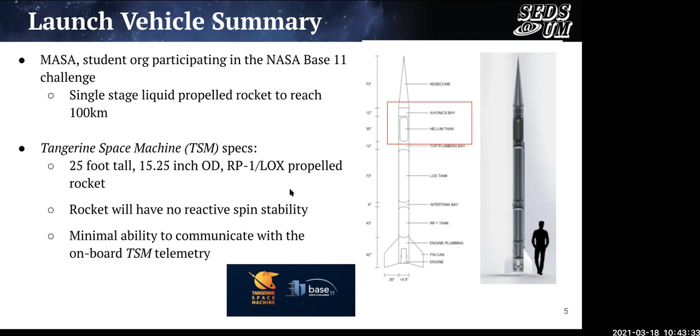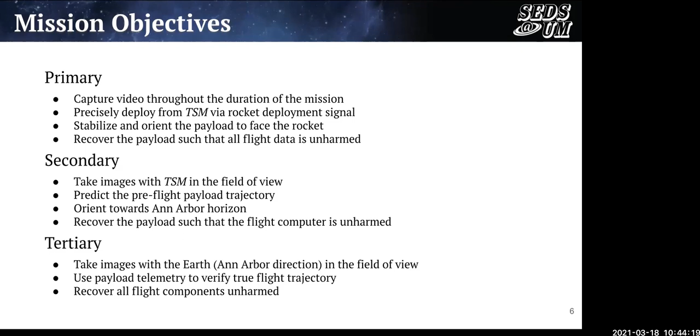So our mission objectives: we want to capture video throughout the duration of the mission. We want to precisely deploy from TSM via a rocket deployment signal. We want to stabilize and orient the payload to face the rocket. And then we want to be able to recover all the flight data. Some of the secondary and tertiary objectives involve taking precise images during this mission and being able to orient ourselves from looking at the rocket to looking at the Ann Arbor horizon, and then taking in all of the flight data that we're getting and being able to verify the true flight trajectory, and, as you'll see in a little bit, how it sort of matches up with our pre-flight simulations.

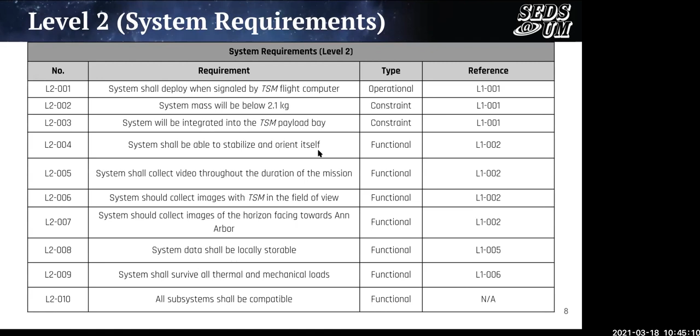So then those requirements flow into our level 2 requirements. Again, these are very similar, and we just have, again, the reference to be able to flow down and see how these requirements decompose the L1 requirements, and we'll be able to see the same when we get to the subsystem requirements. Here's just a basic traceability matrix of the requirements, and again, just that same idea that we can see how achieving requirements works all the way up to our ultimate mission goal.

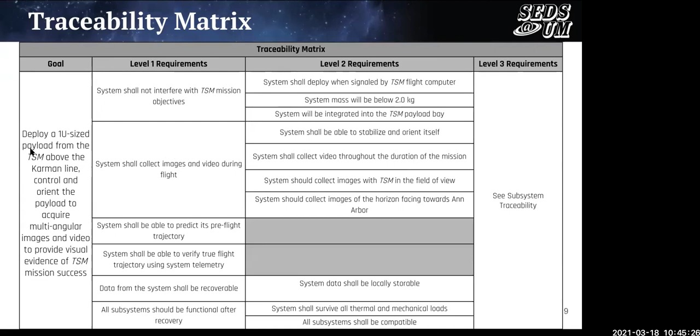Hi, so this is just an overview of our concept of operations, the same as the last time we had a meeting. So our basic concept is that we will lift off inside the TSM, and then we will eject from the TSM and stabilize, rotate around to image the TSM, and then after that we will be taking images of the local horizon. Then we will deploy a parachute and land and be recovered by the staff at White Sands.

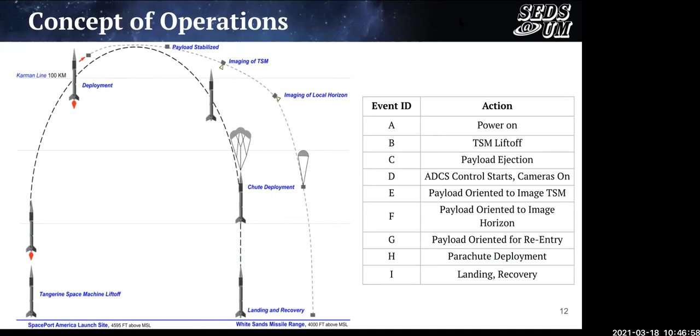This is simply a breakdown of our ConOps by subteams. So the image on the right is basically showing when each subteam is active and when they are going to be in action. So as you can see, CDH and EPS will be on the entire time. The cameras will be on the majority of the time, and then other subteams will have little bursts of activity throughout the duration of the mission.

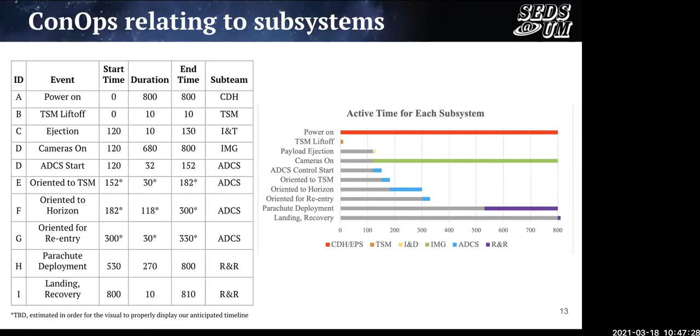This is a definition of our coordinate systems that we will be using for the rest of this presentation. So we have two coordinate systems, one for the rocket, which is centered on the body of the rocket, and one for the payload that is shown in green, which is centered at the payload center of mass.

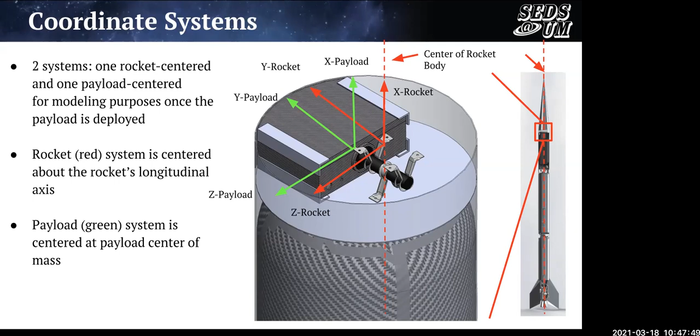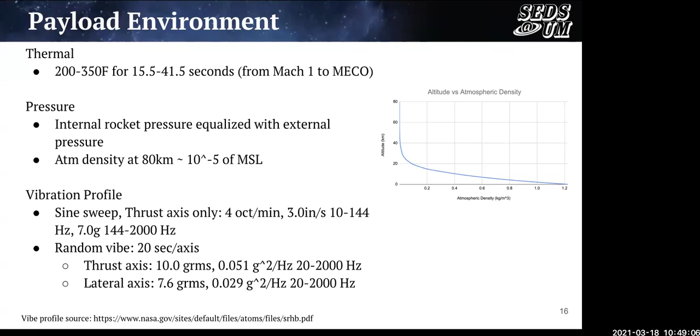So this is a real fast rendering of what the payload is going to look like and where it is going to be in the TSM. So on the left-hand side, you can see the payload is integrated in the TSM. The outside shell of the TSM body is not shown on the bottom half, just so that you can visualize the helium tank and the payload itself.

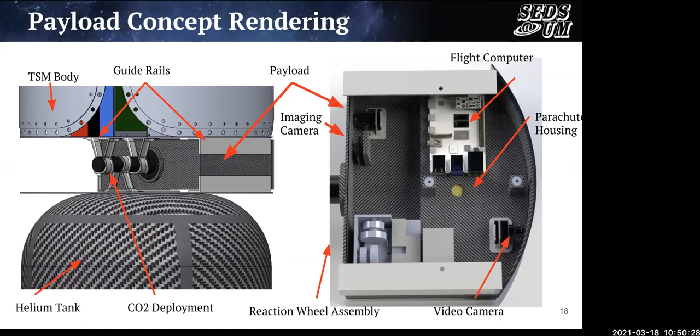It will be interfaced directly to the TSM using guide rails, and then as you can see on the right-hand side, this is a basic layout of the components inside of our payload. So we have the reaction wheel assembly on the bottom left, the video cameras on each side of the payload, and then the parachute taking up the bottom right side of the payload. And then this is just a video to better show the locations of everything within the TSM payload.

This is basically a slide explaining how we are making sure that we are keeping on track with our mass margins per each subteam. The way that we are color coding this is whenever you see a mass budget, if we are within our mass margins, we will label it as green. If we are just on the edge, we'll label it as yellow. And if we're outside of our mass margins, it will be labeled as red.

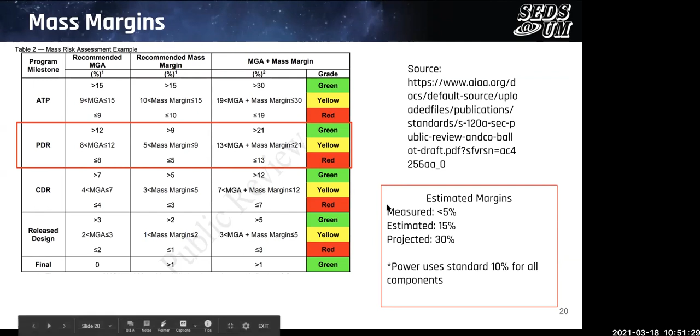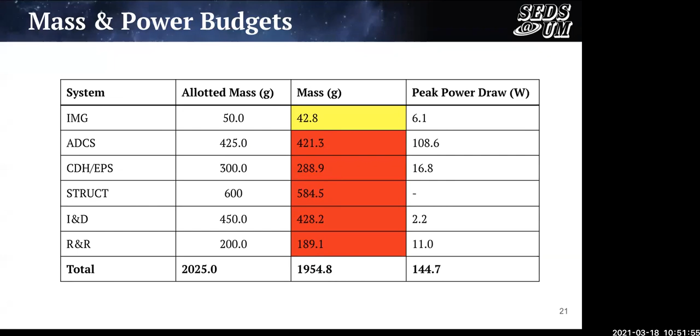As you can see from this slide, per subsystem, we seem to be outside of our mass margin. But if you look at the bottom table, you can see that we are still within our total allotted mass. It's just per subsystem, there are a little bit of differences. So we are currently working on that to lower the mass for each subsystem. But as you can see, we still have not exceeded our total allowed mass.

And now we'll go into subsystem summaries, and I will hand it off to Owen. Thanks, Juliet. So I'm going to be leading you through the imaging and video subsystem. And so this is the team that's responsible for capturing and storing all the image and video data.

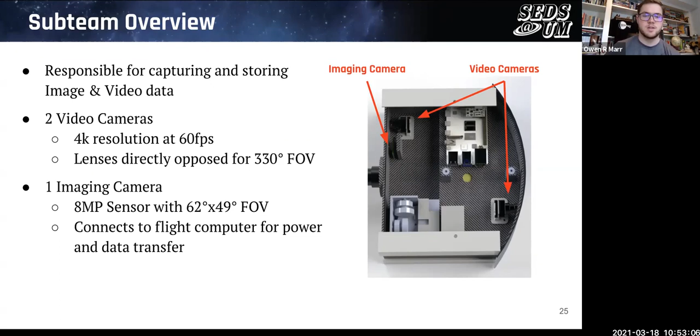And so we'll talk about our requirements in a second, but our overall design is that we have 2 video cameras, which run at 4K 60 FPS. You can see they're kind of opposed there, which gives us a really good field of view. And then we have 1 imaging camera, which is an 8 megapixel kind of normal FOV type camera. And this connects directly to the flight computer and has a couple different jobs.

So here are the selections that we made. So as I said, we had requirements which kind of flowed down. Then we did a trade study for each of these to figure out what the best component is. We ended up with this 10.3 gram camera, which is really, really small, not a lot of mass, but it does give us 4K 60 FPS, which is really what we wanted to get really good quality video. This also stores all the data directly on an SD card. We're going to have 3 SD cards on the payload, which will give us a little bit of redundancy should something happen to one of them.

And then for our imaging camera, we're using the RPi camera V2 because this integrates really, really well with our flight computer, which is RPi. And it also only weighs 3.4 grams, but has an 8 megapixel sensor. And so these are our kind of component level choices for the imaging team.

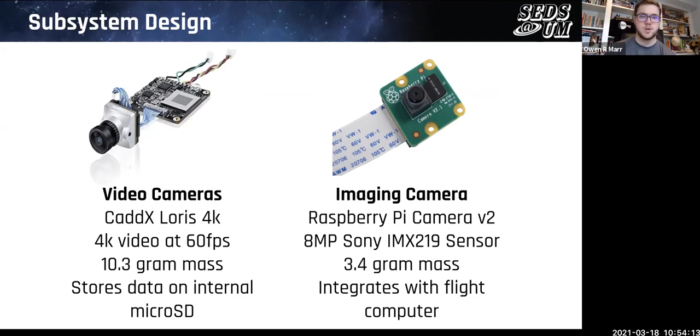Here you can kind of see a little bit of a wiring diagram. Basically, the imaging camera is wired with both power and data to the RPi. And then the video cameras will be provided power through our power bus, but get signals from the RPi to start and stop. And these video cameras start recording as soon as they turn on. So the RPi is just going to send a signal to the power bus, which then enables the power switch basically. And then the video cameras will start recording. And once they're turned off, all the data is stored on their respective SD cards.

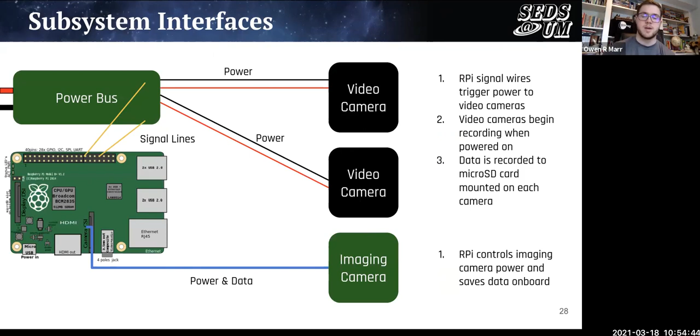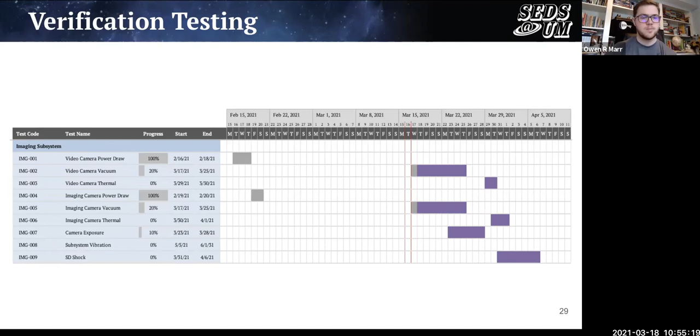All right, I'm going to pass it off to Liam, who's going to go through the ADCS. Thanks, Owen. Hey, everybody. My name is Liam Spence. I'm the BX-4 ADCS sub-team lead. I'll be presenting our slides on the Attitude Determination and Control System subteam.

So ADCS is responsible for implementing solutions that allow our payload to autonomously determine and control its attitude during the mission. We will achieve this through the use of an integrated sensor array, various control algorithms, as well as attitude control hardware that will be dynamic during the mission.

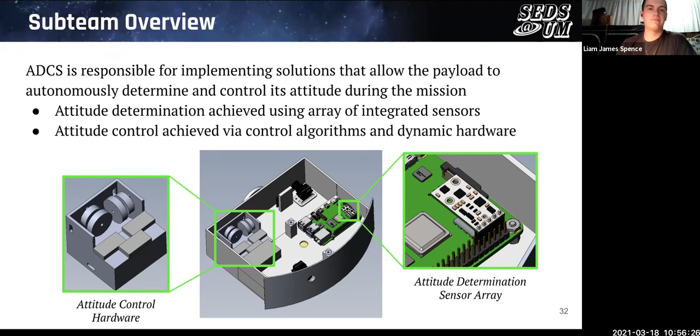To break things down, ADCS is comprised of three main components, each of which will be elaborated on in the following slides. These include attitude determination sensors, dynamic attitude control hardware, and the image processing and inertial control software that ties both of our hardware aspects together.

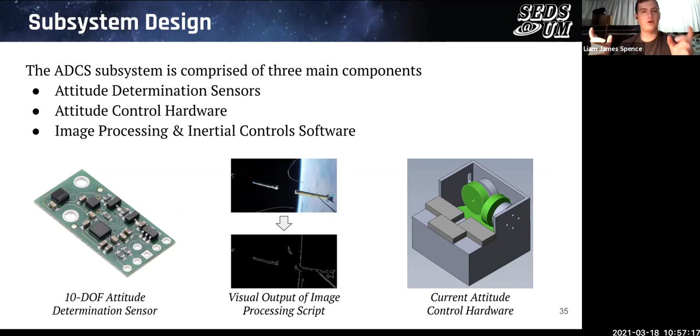Going more in depth on attitude determination, our payload will achieve autonomous attitude determination using a 10 degree of freedom sensor, as well as the still imaging camera from the IMG camera array. The 10DOF sensor measures the dynamics and orientation of the payload using an integrated gyroscope, accelerometer, and magnetometer, all on one low mass board. This board also includes an altimeter that will be used by the reentry and recovery subteam in later stages of the mission.

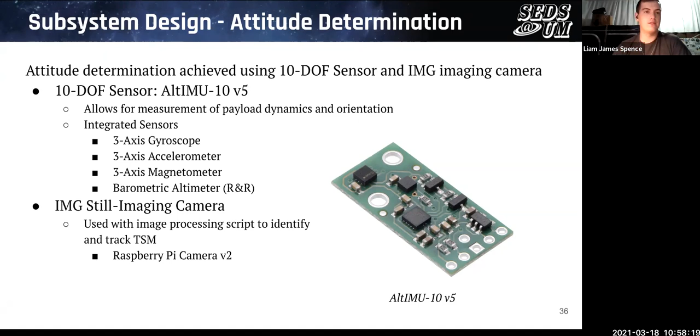The still imaging camera that IMG has now integrated will take pictures of the payload's surroundings. These images will be processed using an onboard processing script, explained later in these slides, in order to identify and track TSM in real time.

This slide covers the technical capabilities of our 10DOF sensor. Functionally, the sensor measures the rotation rates, accelerations, magnetic orientation, and altitude of the payload. Each of these measurements has a large enough range and fine enough sensitivity to adequately measure the expected values we'll see during the payload's operation and flight.

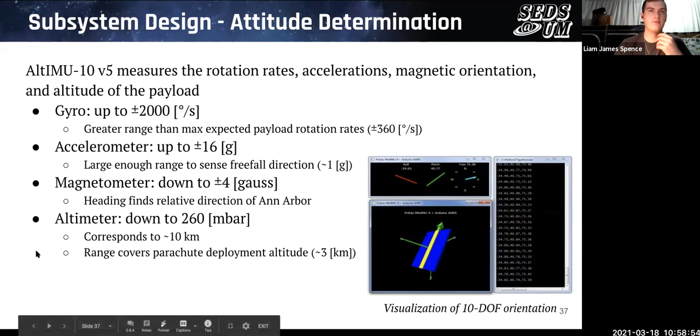Here you can see more of our attitude control hardware. We will achieve our attitude control using a 3-axis reaction wheel assembly, comprised of one reaction wheel, a combination of motor and flywheel, mounted parallel to each of the 3 primary payload axes.

The reaction wheels will be powered by electronic speed controllers, or ESCs, in order to apply torque to the specified flywheel, spinning it up to a high RPM. The spinning flywheel will then impart angular momentum into the payload such that it counters the momentum imparted to the payload during deployment and the previous flight during ascent.

Payload angular momentum from deployment and from the flywheels, equal in magnitude but opposite in direction, will lead to a net zero rotation rate in that axis. Spinning the flywheels faster or slower than the rate required to negate the payload's own angular momentum allows our ADCS subsystem to properly control its attitude in all 3 axes during the mission.

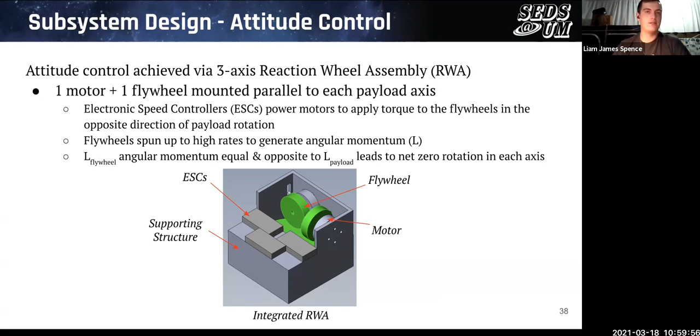The 3 main components of our reaction wheel assembly include brushless DC motors, electronic speed controllers, and metal flywheels. For our motor choice, we selected a high-performance motor model commonly used in acrobatic and racing quadcopters due to its high torque and max RPM ratings.

The ESCs we selected host an onboard microcontroller that allows each to be individually programmed and tuned outside of any integration with the payload's own flight computer. This will allow the ESCs to have different fail-safing modes in response to a variety of off-nominal power conditions we might experience during flight.

They also run their own closed-loop PID control using feedback from the 3-phase motors to properly spin up the flywheels as commanded. For our flywheel design, we currently have selected discs made of brass, due to the simplicity of manufacturing and the high material density that these provide. We anticipate continuing to use brass as our flywheel material.

However, we are currently pursuing other more complex flywheel geometries that will allow us to make the reaction wheel assembly overall more compact, as well as increasing the moment of inertia efficiency of each flywheel in each axis.

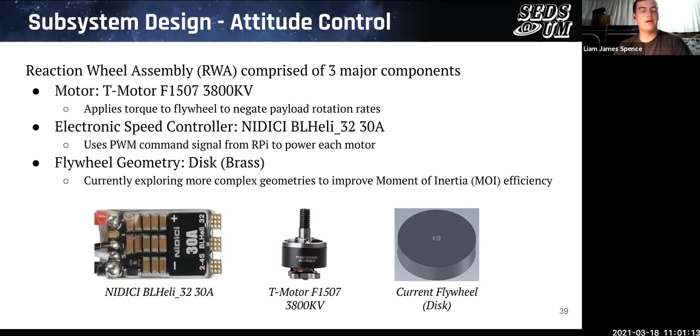In addition to the flywheel considerations, some future work includes collaborating with the integration and deployment team to determine the feasibility of adding additional sensors into our payload. These sensors would sense rotation on the motor if we go with them, and would allow more fine-tuned control of the motors spinning at lower RPM. This would in turn allow the payload to have very precise control of its rotation rates in each axis, compared to our current design.

So while sensorless control, the current design we selected, is feasible and achievable with our current hardware selection, exploring a more sensored control using external motor encoders would further increase our control capabilities of the payload.

Initially, the ADCS subsystem will attempt to negate the rotation rates imparted during deployment in each payload axis, as previously described. Once these are all approximately zero, the next script will begin the process of finding and tracking TSM using images from the IMG script. This script will be further elaborated on in later slides.

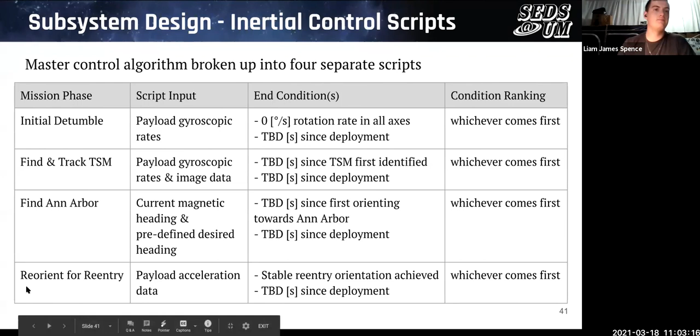So for current progress, we have created the pseudocode and logic flow for each of these software scripts, as well as nearly completed a Simulink program that will help us refine the PID gains used in our overall flight control loop. Each script presented in the previous slide will implement closed loop PID control using the 10-DOF sensor data as feedback.

The output of these scripts will then be commands to the reaction wheel assembly, which will be processed and implemented as torque to the motors by the ESCs that I described earlier.

In the near future, we will determine additional appropriate time-based cutoffs for each script's end condition, to ensure our payload does not become latched up in one of the intermediate scripts during the actual mission.

So now I'll hand it off to Trina to go over a bit more of the image processing aspects of the ADCS software.

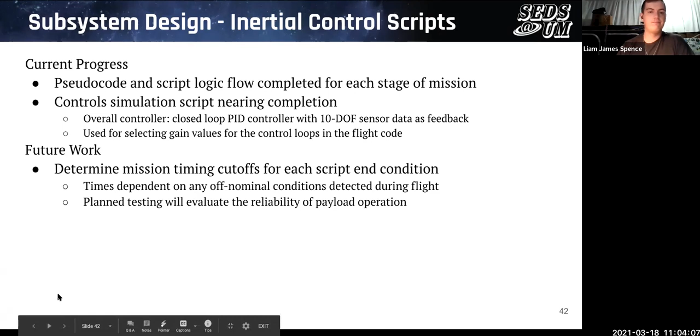Hi, my name is Trina Dada, and I will be talking a little bit about the ADCS image processing script. We'll be using OpenCV, an open source image processing library, to identify and track TSM given images from the still imaging camera.

The script will use a combination of edge detection as well as color distributions to identify the contours of Earth, TSM, and space.

Once TSM is identified in an image, we will calculate the location of the center of the contour and orient our spacecraft to match TSM's center with the center of our still imaging camera's field of view.

Our next steps include identifying the actual elements. For example, TSM should have two long parallel edges, and creating histograms of the RGB values within each contour to verify we've correctly identified the elements.

For example, we can expect nearly all zeros for space, a pretty even RGB distribution for TSM, and a higher blue content for Earth. From there, we can calculate the X and Y shifts required to match TSM's center with the center of our still imaging camera's field of view, and back out the rotation required in each axis.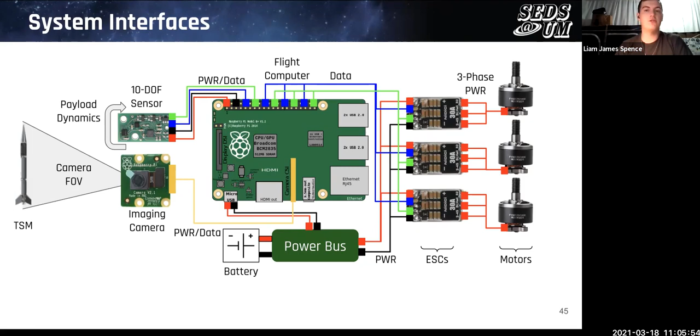Our attitude determination uses its own 10-DOF sensor as well as IMG's imaging camera, and data from both of these sensors will be collected for attitude determination. This data includes the payload dynamics, as I mentioned earlier, as well as image data that is sent back to the payload's flight computer, as Trina just described.

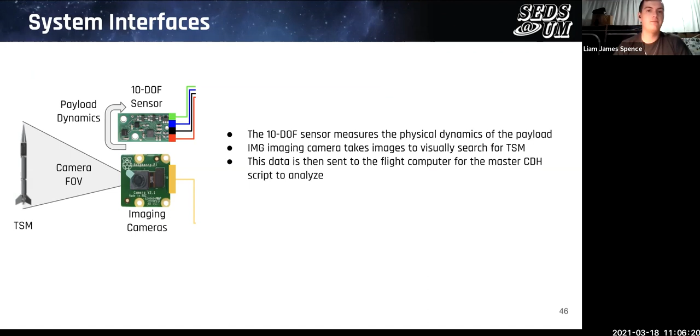The payload's flight computer then uses the onboard script to both process the imaging data as well as the attitude determination data. This is one of the primary components of our command and data handling subteam, and they will go over a bit more about this later in the presentation.

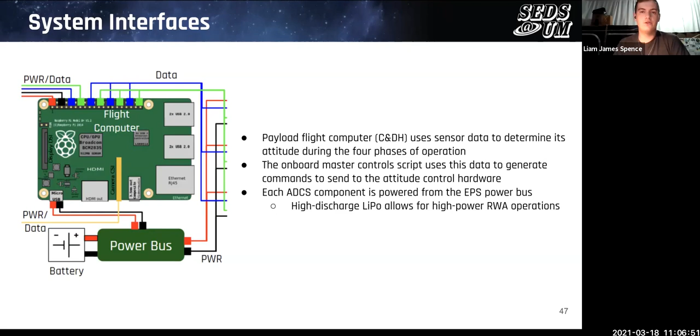All of ADCS's electrical components will be powered off of the payload's power bus, as you saw on that previous slide. It will also be further described by the electrical power systems subteam.

The commands output from the flight computer are delivered to the ESCs, where they're processed by onboard microcontrollers and used to time the power delivery from the payload power bus to each motor's 3 phases.

These motors will spin up the flywheels to many thousands of RPM during the mission, which requires heavy collaboration with the structures subteam to design adequate mounting solutions so everything maintains structural rigidity during flight.

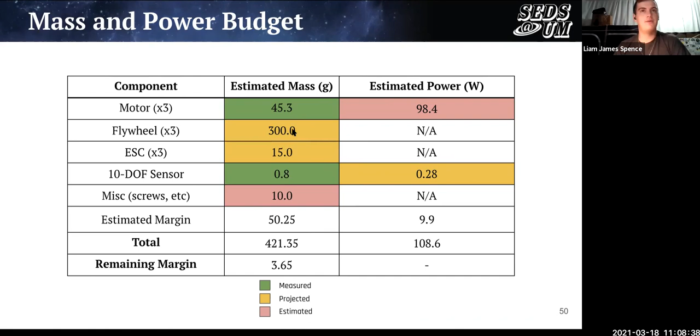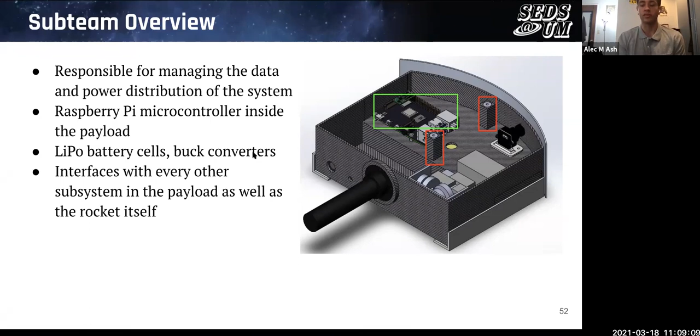For our subsystem design, we started with our choice of microcontroller. We chose a Raspberry Pi 4B, as it has up to 8 gigs of RAM and a 1.5 gigahertz CPU clock. It's the most cost-efficient microcontroller, costing only about $75, and is more than capable for our purposes. It can easily interface with all necessary subsystems, as it's capable of transferring simple input-output data, as well as more complicated serial, I2C, and PWM interfaces.

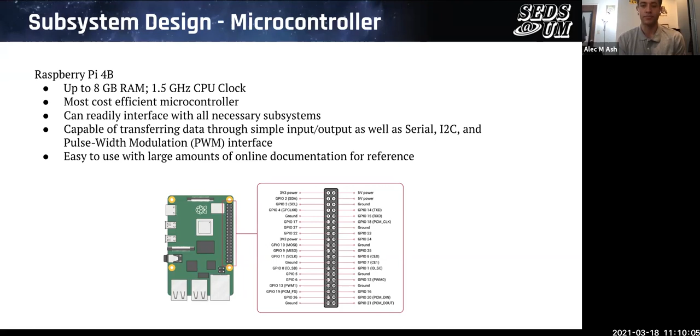For our battery selection, we chose lithium polymer over the alternative, lithium ion, due to its high instantaneous current capacity and much greater safety. Lithium polymers do have a lower power-to-mass ratio, but we decided the pros much outweighed the cons.

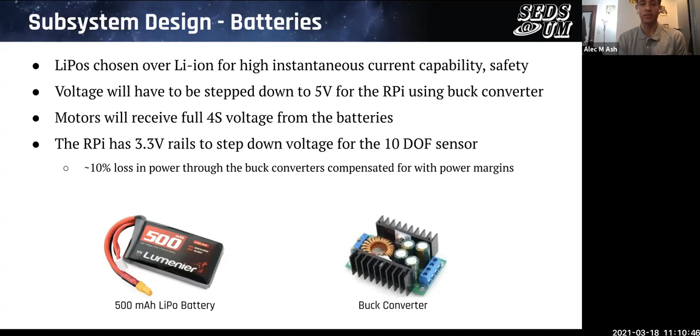The voltage from our power supply will have to be stepped down to 5 volts for the Raspberry Pi, but our motors will be able to receive the full 4S voltage configuration. The Raspberry Pi has built-in 3.3 volt rails, which will further step down the voltage to the 10 degree of freedom sensor, as well as other components.

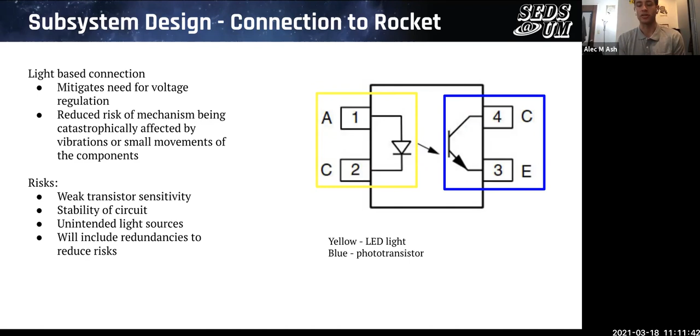We chose this configuration because it mitigates the need for large voltage regulation. The signal coming from the rocket itself will be about 12 volts, which is far too great for the flight computer to handle. So if we can take that 12-volt signal and convert it to a 3.3-volt signal without active voltage regulation, this simplifies our design greatly. It also reduces the risk of the mechanism being damaged by vibrations or small movements during launch and ascension, as could happen with a magnetic or spring-loaded connection.

Taking a closer look at our deployment circuit, the red box in the top left represents the voltage coming from the rocket. That comes in across the top horizontal line, gets relayed by our optical connection, and is read into the Raspberry Pi as our deployment signal. Once we receive that deployment signal, we send a signal to a MOSFET switch, which closes the circuit on the left, redirecting the voltage from the rocket to our deployment mechanism, initiating deployment. Since we have no physical connection over the optical link, the payload will be able to eject swiftly and easily.

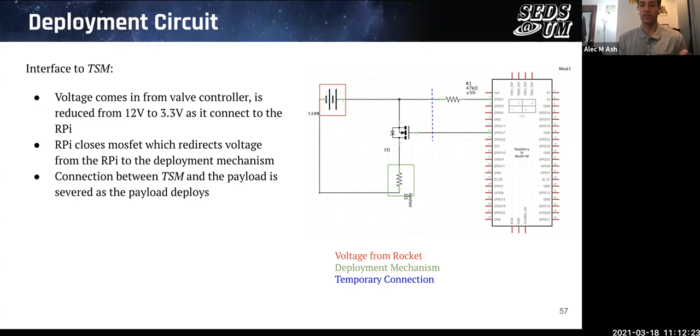To go a little bit more into our interfaces with the other subsystems, we are going to use a PCB to distribute the power independently of the RPi, and this power bus will include all necessary voltage converters. We are going to mainly use GPIO pins to send both binary input-output signals and the more complicated information to the other components. The Raspberry Pi imaging camera that Owen mentioned earlier will be connected through the camera port. The video camera will transmit data over the serial interface pins, and the IMU sensors will be able to transmit data over the I2C pins.

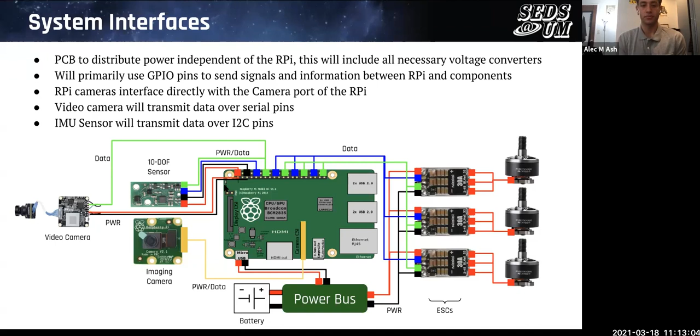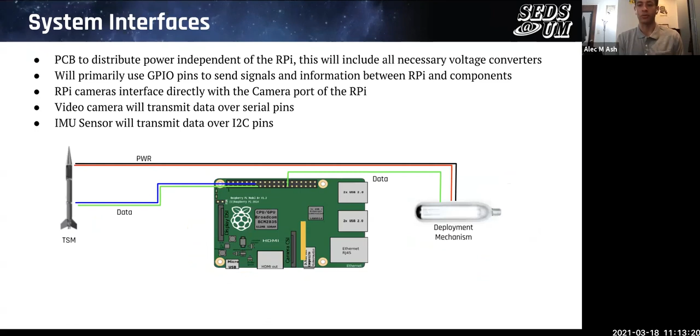And then again, this is just another look at the overall deployment mechanism. We will receive launch and deployment signals from the rocket, and we will relay that deployment signal to our deployment mechanism, which will close the switch on that power, redirecting that voltage from the rocket to our deployment mechanism.

A closer look at some of the data that we will both receive and transmit to the other subsystems. To the IMG subsystem, we will continuously power the video camera, as well as send a trigger signal to take still images. The flight computer will implement their computer vision algorithm to detect the edge of the rocket as a reference for our attitude determination.

For the ADCS subsystem, we will read in and log their telemetry data, which will be used to reconstruct the true flight trajectory, as well as feed this data to the control script, which will then be converted to commands sent to the ESCs. For the reentry and recovery subsystem, we will send a signal to deploy their parachute upon reentry. And finally, we will receive signals from the TSM rocket through our phototransistor at the launch and deployment events.

Here's just a quick look at our verification testing. We've just about completed our testing on the optical connection, and I've completed the testing on our sleep state for the RPi on the launch pad. The next step will be to conduct thermal and vacuum chamber testing to ensure that the RPi can operate at all of our expected conditions.

We will then test the data transfer from the IMU sensor through the flight computer to the ESCs, as well as verifying our triggering of the camera, deployment mechanism, and parachute. And finally, we will end up testing our full script, as well as our full battery output.

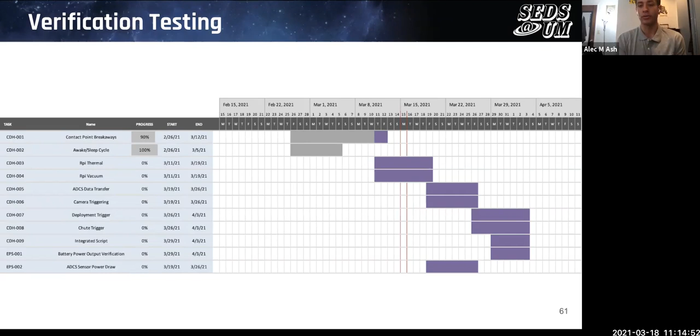Thank you, Alec. My name is Rodrigo. I'm the structures lead, so now I'll be giving you an overview of our subsystem. So structures is responsible for housing and protecting the payload components throughout all stages of the mission. The way we will do this is by a 3D printed shell, also with a 3D printed lid that will bolt on top. And this shell will interface with the outer rocket skin, the deployment mechanism, and the parachute housing.

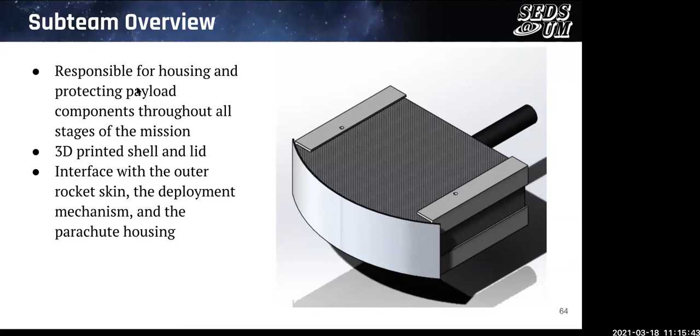So here are requirements. I'll highlight that obviously the structure shall house all components through launch, deployment, and reentry. We shall not jeopardize the structural integrity of our launch vehicle, the TSM, and our structure will fit within the allotted payload bay in the TSM.

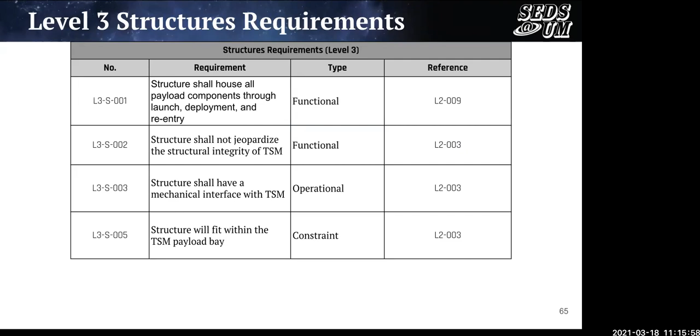Sorry, it lagged for a bit.

Our subsystem interfaces. The cameras will have 3D printed mounts and have a glass protective lens on the payload shell. Reason for this is, you can see in the top left picture, the camera facing the curved edge. That curved edge is going to get very hot due to aerodynamic heating. So a protective lens is needed to make sure the cameras do not sustain any sort of temperature damage.

The RPi will be suspended on standoffs, which will be directly printed into the payload, with the 10-degree of freedom sensor directly attached to that board. The reaction wheel assembly, which is that silver box you see in the top left, will be in its own isolated mechanism, which will then bolt into the payload.

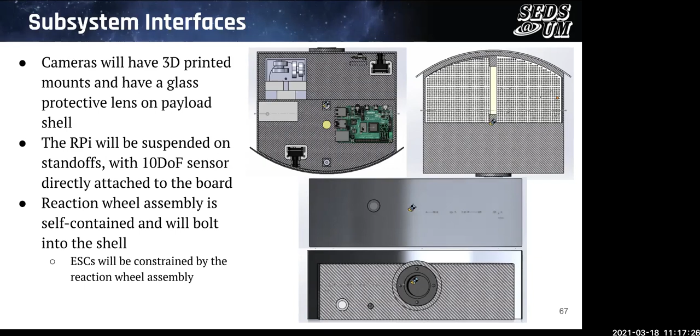So to validate our design, we decided to run a structural FEA on the payload design. The purple regions that you see are fixed supports, meaning it cannot move in any of the 3 directions. And then we applied an acceleration to the entire body. The acceleration applied was 67.2 meters per second squared. This was a worst case scenario number that we pulled from the flight simulations that MASA did on their vehicle.

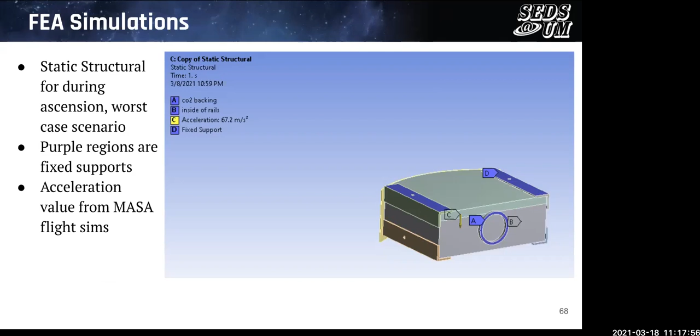And so from this, we see a max stress of about 2 megapascals at the interface between the rail and the shell lid. I want to emphasize that this is a strictly mechanical loading. This is not coupled with the thermal loading we expect to see. That simulation is still being refined. It's not pictured here, but the stresses inside the shell itself are minimal. So this is good. It'll have very little impact on the internal components.

And so taking this max stress and the data from the manufacturing company that will 3D print this shell, we get the following safety factors in the 1, 2, 3 direction. So the 1 direction being the strongest, around 40, the 3 direction being the weakest, around 19.

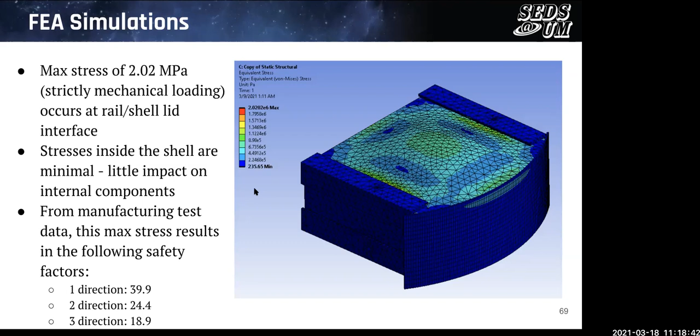So here's our mass and power budget. As structures, we don't really have a power budget. The shell body and the shell lid mass estimates come directly from the SolidWorks file. We are assuming about 25 grams for the bolts and mounting, although that hasn't been measured yet, with an estimated margin of around 80, which brings us to a total of 584, which is still below our allotted mass of 600 grams.

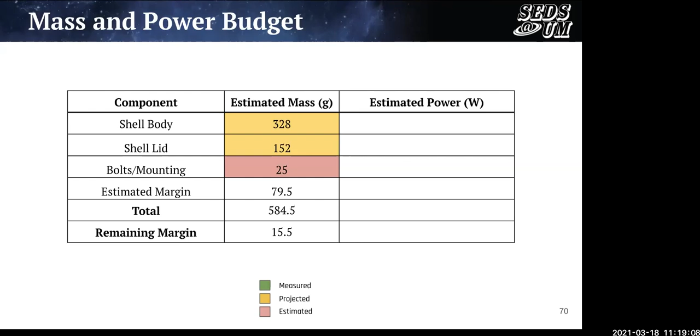Now I'll hand it off to integration and deployment. Thank you. Hi, my name is Rachel Byram. I'll be presenting for integration and deployment. I'm also the lead for the sub-team.

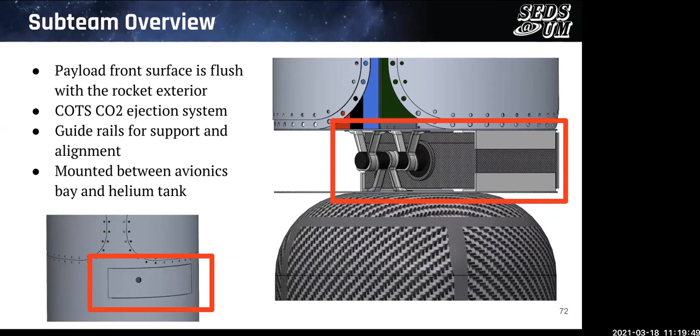So our sub-team is in charge of creating a deployment mechanism for the payload to deploy. And we're also responsible for integrating with the rocket. So we've done this by creating a CO2 ejection system, creating guide rails and plates for support, and then mounting in between the avionics tank and the helium tank and the avionics bay.

So for the payload supports and integrating with the rocket, we're going to have guide rails that are highlighted in red. They're basically L brackets on all 4 corners of the payload. And then we also have a bottom plate and a top plate to mount those into. It's the bottom of the avionics bay and then on top of the helium tank. And this limits the direction of motion for the payload so that it can only deploy in the plus Y rocket direction. The rails also have a low coefficient of friction and low coefficient for thermal expansion.

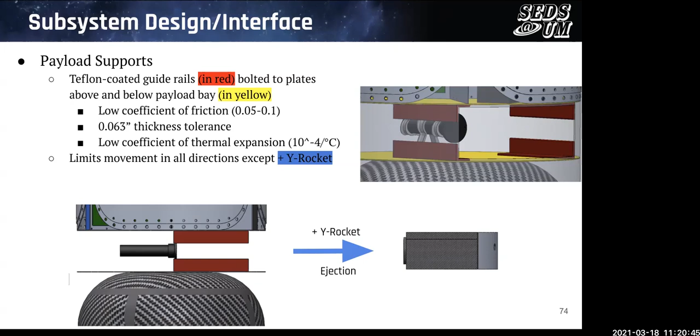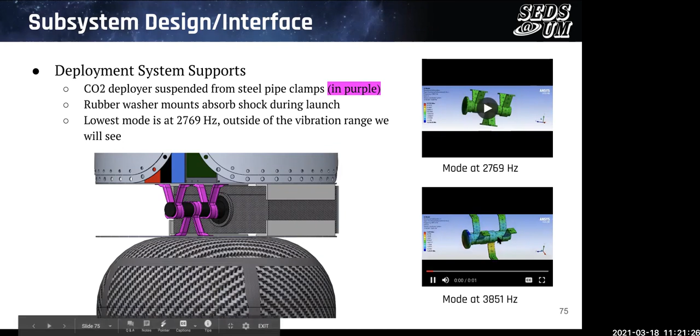To keep the payload in place on ascension and before we deploy, we have nylon fasteners that are mounted into the avionics plate and the Teflon coated rail and into the payload. And then when the CO2 pushes against the payload and has that ejection force, the pins will physically shear off so that the payload can deploy when we want it to. The required shear force per fastener is 39.7 pound force.

And this is a breakdown of the CO2 deployer that we're going to be using. We're going to be using 8 grams of CO2. We're going to have to partially vent that because it provides a little bit more force than we want for our desired range of velocity. So we're going to have to vent that, but we are using the smallest available, which is 8 grams of CO2. We really wanted to have a part that was manufactured outside of ourselves, so that it's been reliably used in other aerospace applications.

It's triggered using the MJG firewire electric match and ignites the black powder, which pushes the CO2 bottle and opens the pin, allowing the payload to deploy. And then for our safety, because we're using black powder and everything, we are going to be using remove before flight key tags, which disengages the electrical match connected to the black powder and the CO2, just for team safety leading up to launch.

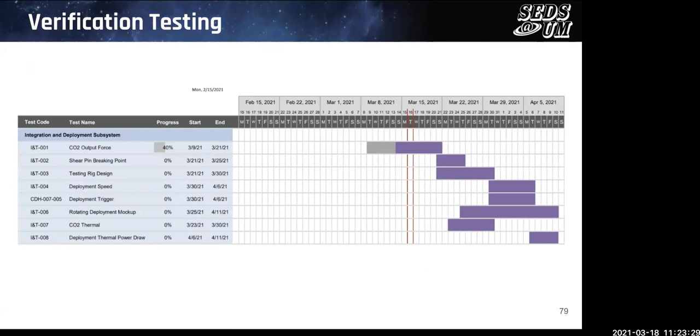And this is our verification testing that we're doing. Right now, we're in the middle of testing our CO2 output force and verifying our feasibility for our system. And then once we do that, then we'll move into thermal testing and verification testing for the rest of our system.

Thanks, Rachel. Yes, my name is Jacoby Kroschel. I am the lead for the reentry and recovery subteam. So kind of a subteam overview. We're going to be using an altimeter-driven parachute deployment using line cutters.

So here are our requirements. They are similar from the last presentation. The one to note is the parachute shall decelerate the payload to 5 meters per second or below for landing. This will provide sufficient deceleration in order to recover all data intact.

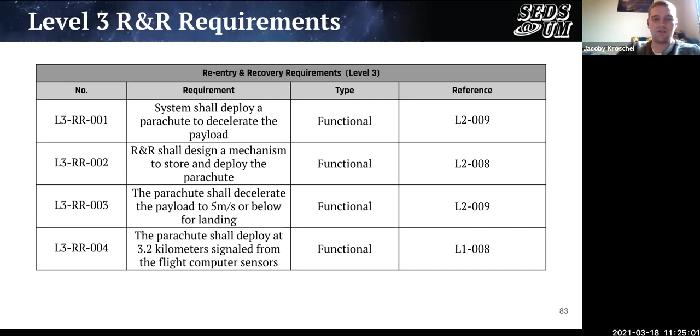So for subsystem design, some of our selected components were the Iris Ultra 36-inch parachute. This was selected because the parachute parameters allowed for a velocity sufficient to be within that 5 meter per second impact speed. And the parachute system will be comprised of a swivel, shock cord, as well as the parachute.

We're going to be using the Tinder Rocketry Piranha line cutter. This will shear the webbing and allow the parachute to release when triggered, and it's going to be powered by an electric match. And then we'll be using the AltIMU 10 degree of freedom data from ADCS in order to know when the E-match should ignite.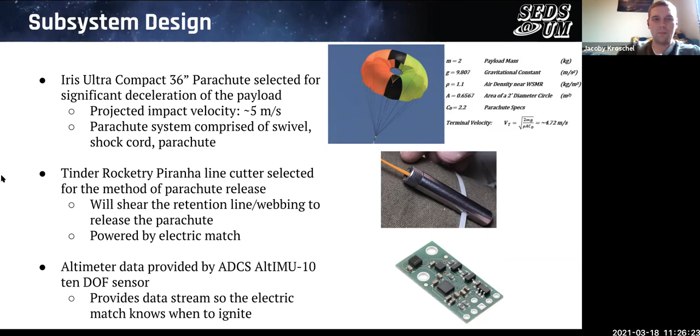So for the netting material, we plan on using solid braided nylon rope. This should be sufficient in holding it in with a tensile strength of 320 pounds of force. The barrel swivel will be used to reduce risk of entanglement once the parachute is deployed. The shock cord is used to dampen the impact after parachute deployment, and the MJG FireWire will ignite the black powder that severs the netting.

So here's our interface with the flight computer. We'll be receiving signal in from the AltIMU 10 degree of freedom sensor. That signal will be processed by the RPi and provide signal to the power bus in order to ignite the E-matches and therefore the line cutters. And so the process for that is the 10 degree of freedom reads into the flight computer, and if all conditions are met, it will allow the signal to the power bus that will ignite the E-matches and the line cutters.

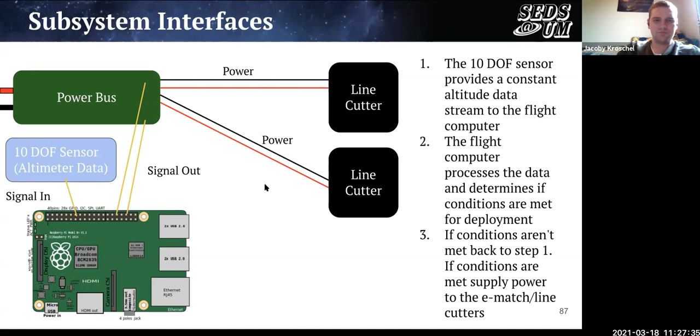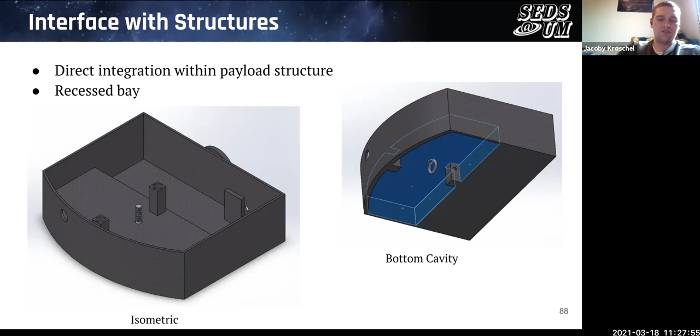So here you see our interface with structures as a direct integration. On the left side, you can see the isometric, and on the right side, the highlighted bottom cavity of where the parachute will be sitting. Also note that there's an eye bolt in there, which is how we plan to mount the parachute to the shell, and it will be screwed into the lid that is not pictured here.

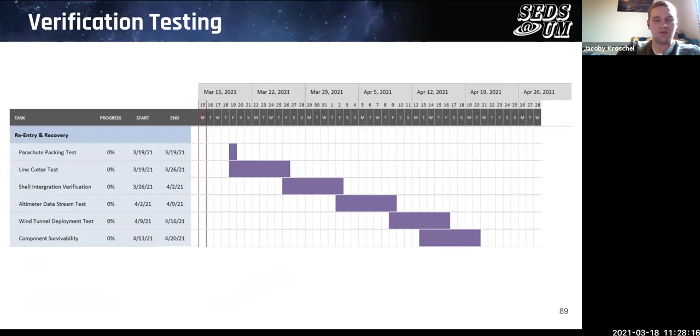As for testing, we plan on getting started in the next couple of weeks with parachute packing tests and line cutter tests, followed by shell integration, altimeter data stream test, wind tunnel deployment tests, and then finally component survivability tests. Our estimated mass right now is about 189 grams, which is under the 200 gram mass limit, and the estimated power is about 11 watts.

And now I'll pass it to Joe to talk about the manufacturing plan. Hi, I'm Joe Carey, and over the past couple of months, I've been heading up the manufacturing plans as we move forward with finalizing our design and move towards actually manufacturing parts of our payload.

There will be the shell, which will be 3D printed, and then there will be the flywheels for the ADCS control system, which will be cut with both a lathe and then pressed with a drill press.

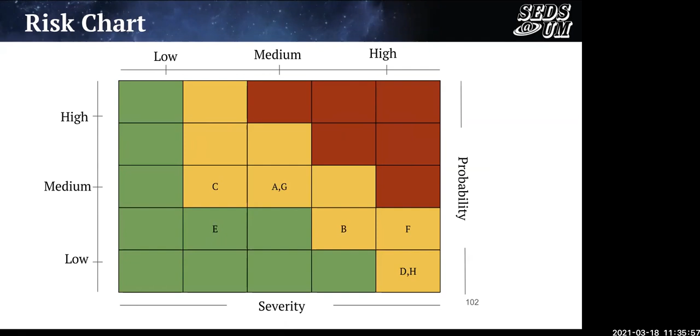Then the last thing we want to talk about is our system verification and validation. This is just a quick showing of what we want to do once we have the system fully ready. We want to be doing a full payload vibration test using that vibration profile that was provided in the environmental analysis slide. We will have to coordinate, but we should have access to the Space Physics Research Lab vibration table. We have worked with Dr. Van Noord using that table for previous payloads, so we are very comfortable that it will be able to accomplish what we need it to.

The next big test we want to do is thermal vacuum testing. We want to hopefully test the entire payload, simulating that temperature profile we mentioned previously while running some of our subsystems to really get an idea of how hot all the subsystem components are going to get. We aren't exactly sure on the total feasibility of this, but the backup plan will be similar testing, but just within subsystems themselves.

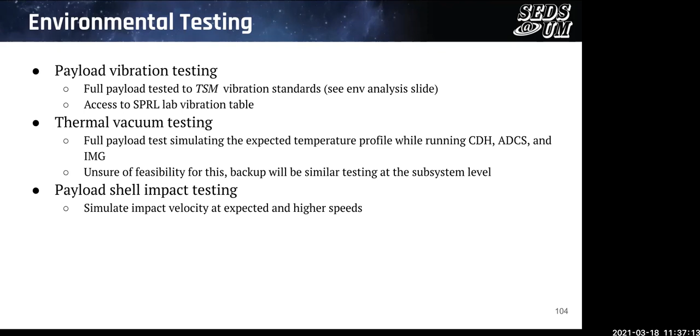And then the last thing is we want to test the payload shell impact, the ability for the payload shell to survive impact. We will be able to simulate the impact velocity and possibly some higher speeds, so we have a level of confidence in our payload shell being able to survive the touchdown.

Last thing, we want to look at the timeline again and note that the next 2 months of this project, while only one of them is within school, the other will run into the summer. As I mentioned previously, we have some students, including myself, that will be here over the summer and able to commit time to this project.

So the focus from here is all testing and all ensuring that our design is going to meet our requirements and is going to meet our mission objectives, and provide undeniable evidence that we are capable of achieving this goal of deploying from a rocket, orienting ourselves toward the rocket, taking images, and then recovering the payload.

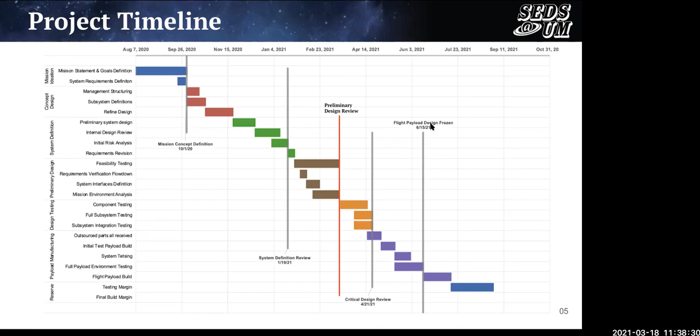As I mentioned before, we have quite a bit of margin on the end. We have about an extra month and a half margin that we can dive into if we need to, but the goal is to have no other outstanding tasks as far as needing to change any of the design by the middle of June, so that at that point we will just need to do the flight payload build.